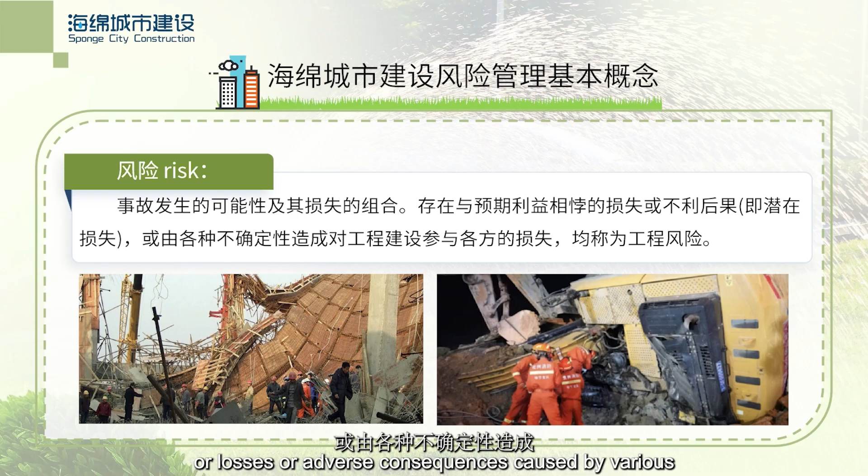Any losses or adverse consequences that are contrary to expected benefits are potential losses, or losses or adverse consequences caused by various uncertainties to the participants in the engineering construction, are also considered engineering risks.

Risk management. This is the process of the project in which all parties involved in the project, including the owner, survey and consulting units, design units, construction units, supervision units, monitoring units, etc.

By defining risks, identifying risks, analyzing risks, evaluating risks, and controlling risks, we aim to optimize the combination of various risk management techniques and carry out effective risk control and proper follow-up treatment throughout the entire process of project implementation.

Risk definition: the process of establishing engineering risk management grading standards and dividing risk assessment units. Risk identification: the process of identifying the types of potential risks, accident locations, times, and causes in engineering construction, and systematically screening and categorizing them.

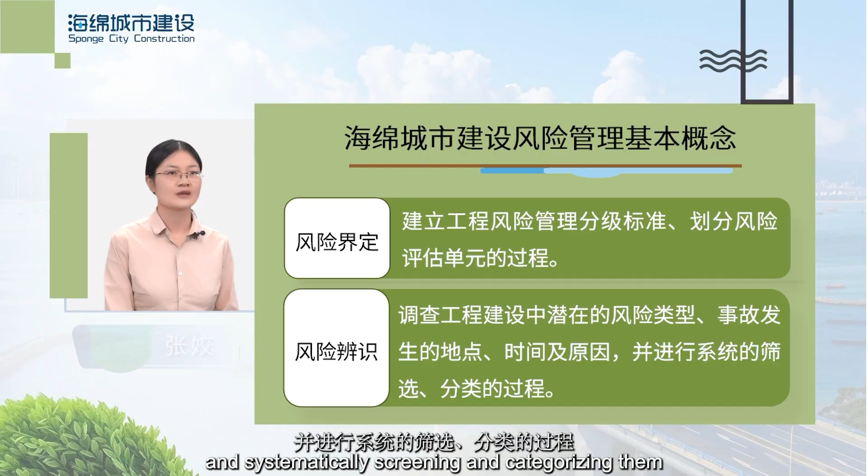Risk analysis. It includes risk identification and risks. That is the process of understanding the nature of risk occurrence and using qualitative or quantitative methods to express the results of risk analysis.

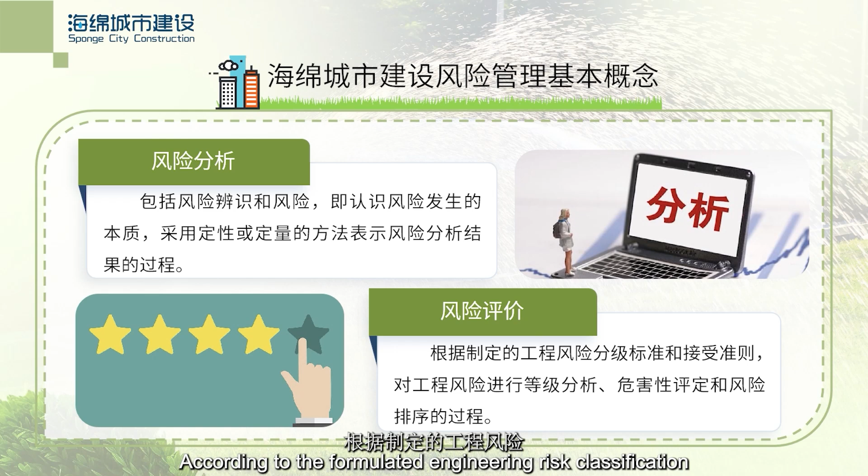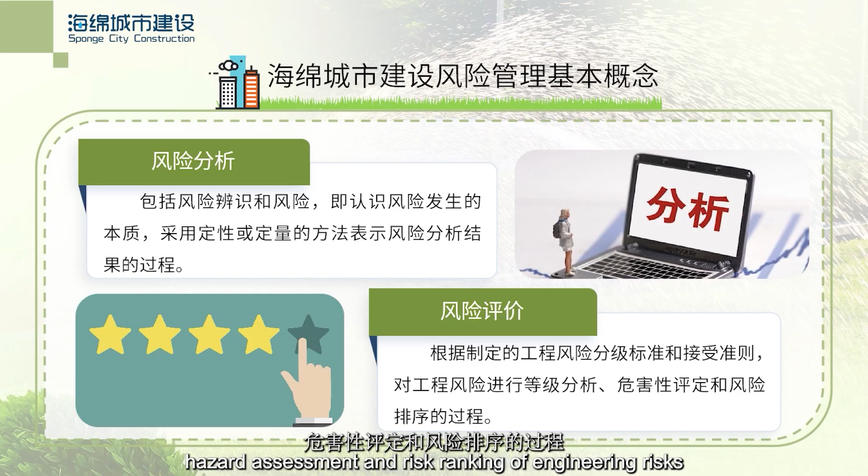Risk evaluation: according to the formulated engineering risk classification standards and acceptance criteria, it refers to the process of grading analysis, hazard assessment, and risk ranking of engineering risks. Risk control: measures taken to reduce the risk of losses in engineering projects, such as strategies, technical solutions, or measures.

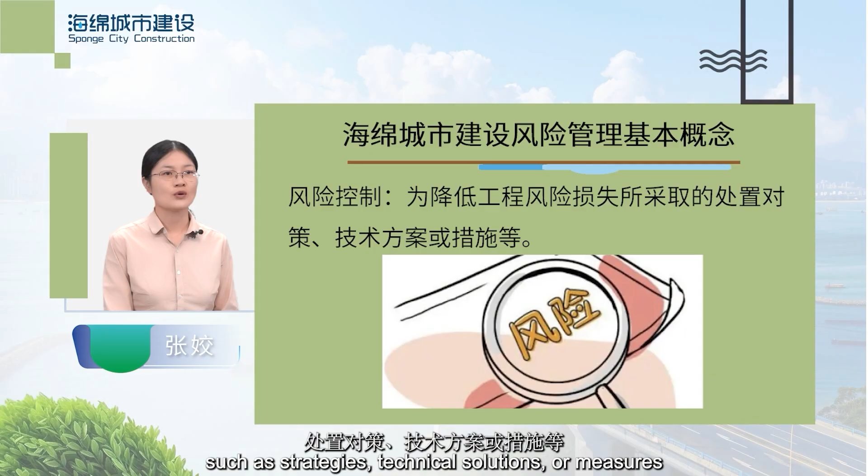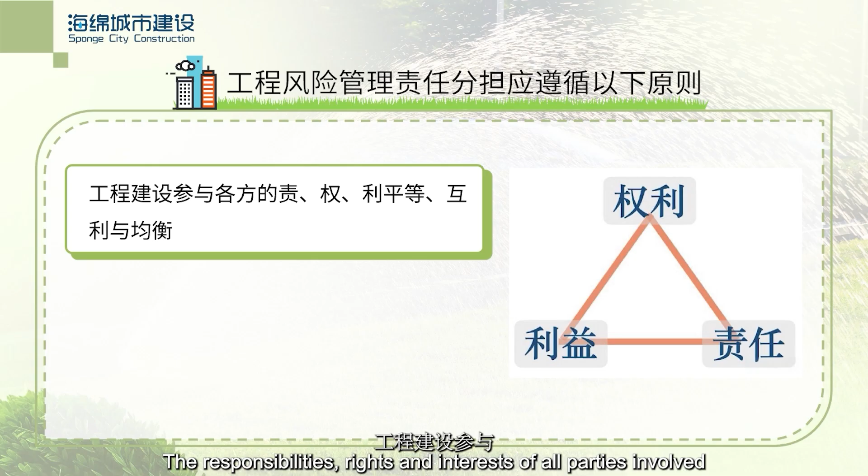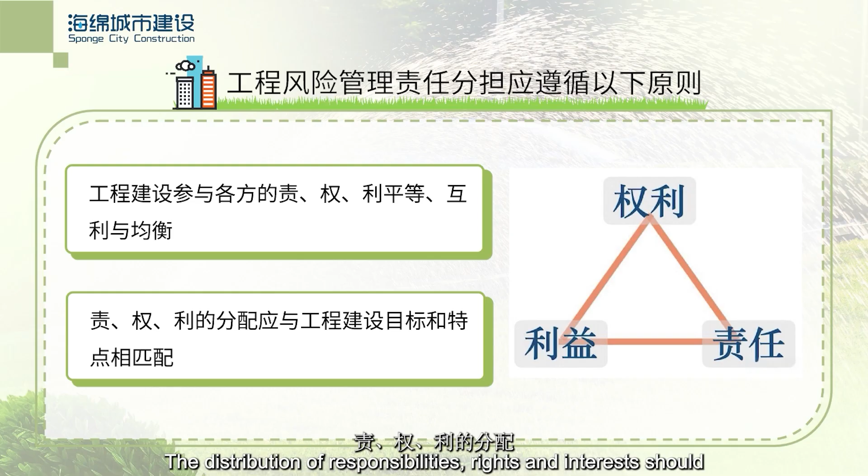The following principles should be followed in the allocation of responsibility for project risk management. The responsibilities, rights, and interests of all parties involved in the construction of the project are equal, mutually beneficial, and balanced. The distribution of responsibilities, rights, and interests should be matched with the objectives and characteristics of the project.

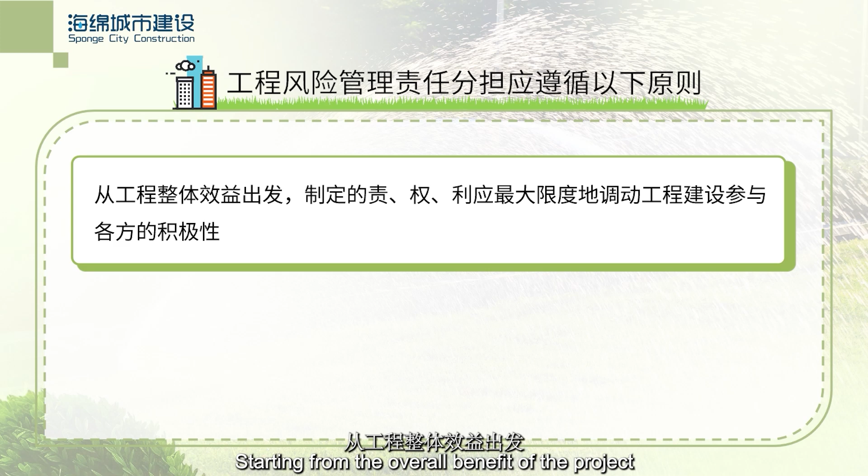Starting from the overall benefit of the project, the responsibilities, rights, and interests formulated should mobilize the enthusiasm of all parties involved in the project construction to the greatest extent. The construction unit shall bear the responsibility for the supervision and decision-making of project risk management.

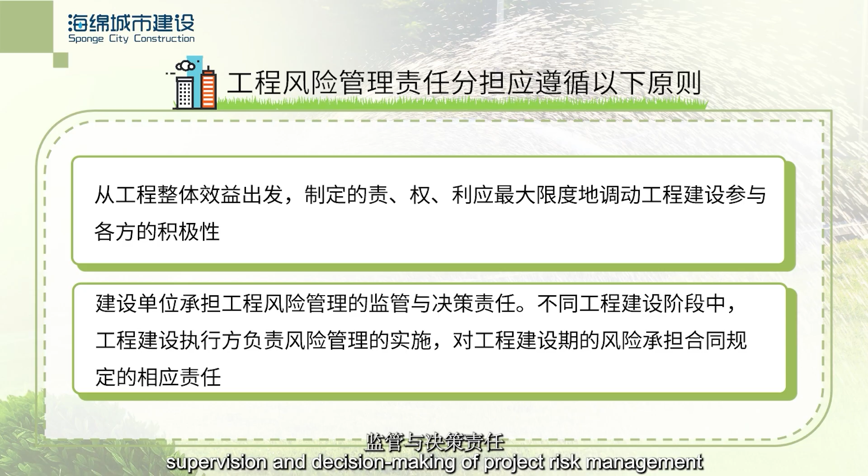In different stages of project construction, the project construction executive party is responsible for the implementation of risk management and bears the corresponding responsibilities stipulated in the contract for the risks during the project construction period.

Risk management of sponge city construction. The water pipeline of the rainwater reuse system is strictly forbidden to be connected with the domestic drinking water pipeline. In areas with high groundwater level and serious runoff pollution, effective measures should be taken to prevent rainwater from infiltrating

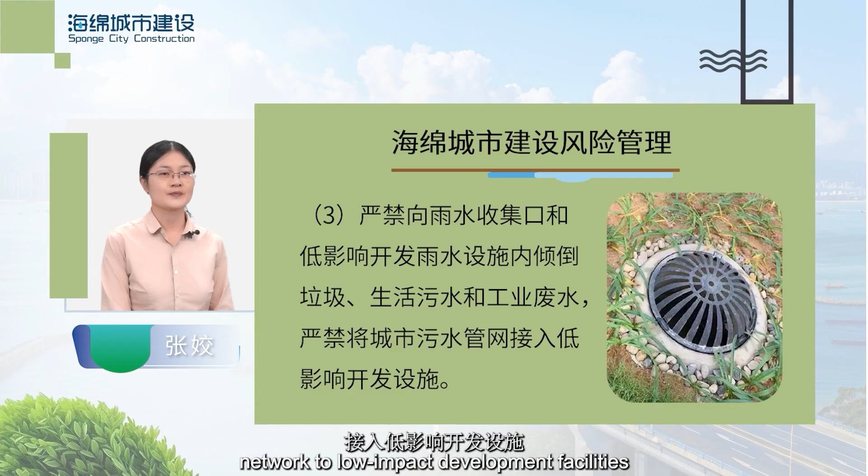and polluting groundwater. It is strictly forbidden to dump garbage, domestic sewage, and industrial wastewater into rainwater collection outlets and low-impact development rainwater facilities. And it is forbidden to connect the urban sewage pipe network to low-impact development facilities.

Warning signs and alarm systems should be set up in urban rainwater drainage channels, waterlogging-prone roads, sunken overpass areas and other areas, as well as large-scale low-impact development facilities, such as wet ponds and rainwater wetlands. In urban green spaces and emergency facilities, full-time management personnel should be equipped to ensure the safe evacuation of personnel during heavy rains and avoid the occurrence of safety accidents.

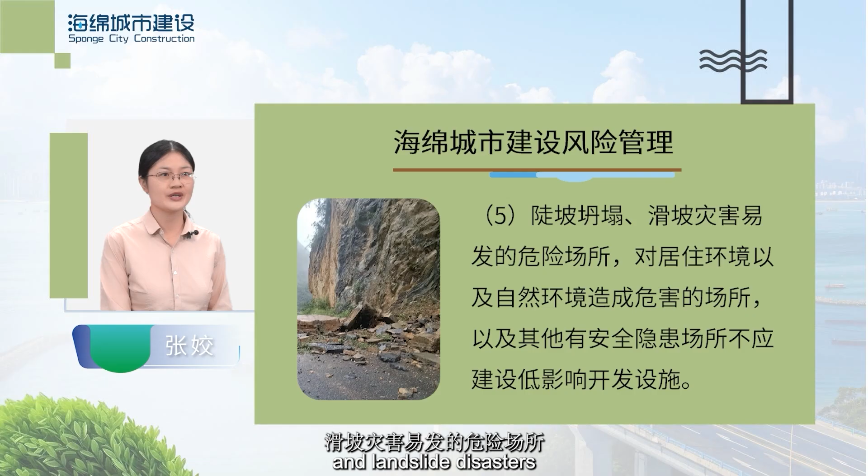Dangerous places prone to steep slope collapse and landslide disasters, places that cause harm to the living environment and the natural environment, and other places with potential safety hazards should not be built

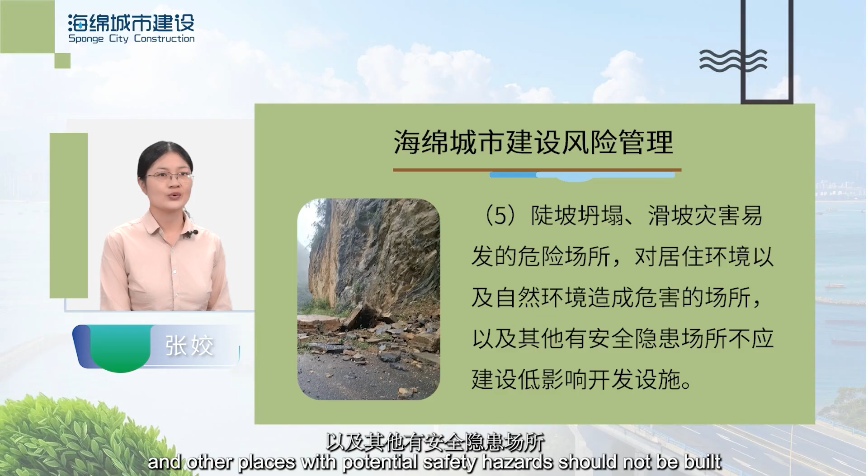with low-impact development facilities. Serious pollution source areas, chemical plants, pharmaceutical plants, metal smelting and processing plants, infectious disease hospitals, oil and gas depots, gas stations, etc., which are prone to accumulate pollutants on the ground, and water source protection areas: in addition to the application of this guide, environmental impact assessment should also be carried out to avoid pollution of groundwater and water sources.

The following risks should be taken into account during the operation of low-impact development stormwater facilities: whether the green roof is causing the roof to leak, whether infiltration facilities such as bioretention facilities, seepage wells, seepage pipes, channels, and infiltration ponds cause the collapse of buildings or structures on the ground or in the vicinity, or cause water leakage in the basement, etc.

In order to reduce the risk of sponge city construction, it is necessary to formulate more scientific, reasonable, and effective policies, including strengthening planning and design, raising technical level, improving economic policies, strengthening social management, and strengthening policy support. Develop strategies and methods to reduce or transfer risk, including risk aversion, mitigation, transfer, and retention.